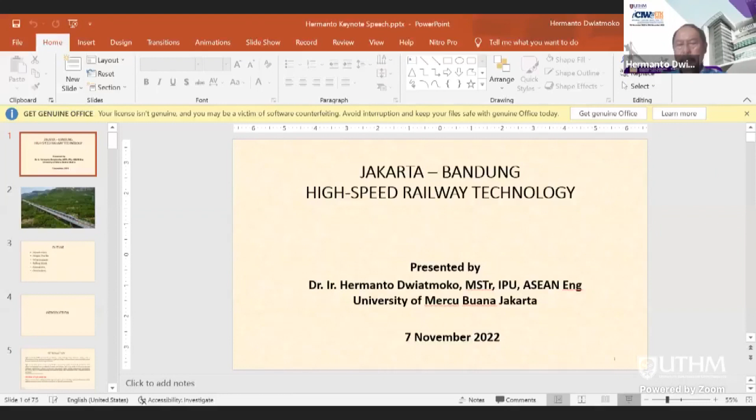Okay, can you see the presentation? Okay, so my presentation is regarding the technology of Jakarta-Bandung high-speed rail, this morning.

As introduced by Prof. Andri, my name is Hermanto Dwiatmoko. I'm from University of Mercu Buana, and also from Indonesian Railway Society, and also Indonesian Engineering Institute. I would like to start with a view of the EMU, but it is in China before they sent it to Indonesia.

So the outline of my presentation: introduction, then project profile, then infrastructure including the track and also signaling and telecommunication, then rolling stock, then operation, and finally conclusion.

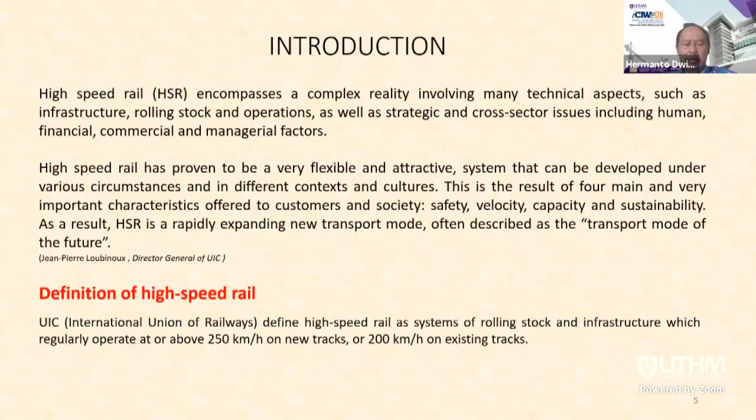Back to the history of the railway: in 1830 there was the first locomotive, founded by George Stephenson in England, UK. Then electric rail cars in 1903, and then the first Shinkansen high-speed rail in 1964, from Tokyo to Osaka.

Then 1981 is TGV from France, and then Pendolino, and then Spain. 2004 is KTX in South Korea. As you know, the maximum recorded speed of high-speed rail is more than 500 km/h, in France with TGV.

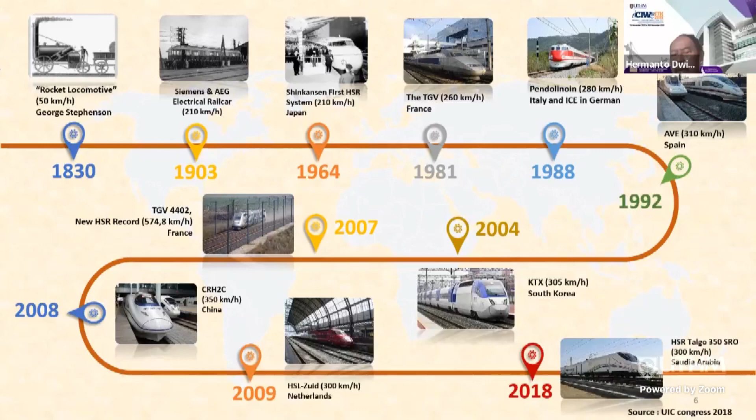Why do we develop high-speed rail? Because conventional rail has limits, especially for speed. First, conventional rail mixes traffic between passenger and cargo, which means we have a limitation of speed.

Second is the constraint of the route, especially because of the curves — small curves like in Jakarta to Bandung, about 500 meter radius. This means the speed cannot be developed.

Then there's the cost of investment for upgrading. If we upgrade our existing track now, it needs more investment because of the track — we have to straighten the curves, and also change the stations and the signaling and so on.

So it's better to use a new high-speed train. There's also the necessity to adapt new rolling stock fleets using the infrastructure, because we need more speed, and also we need new rolling stock. And then there's the difficulty of upgrading while operating.

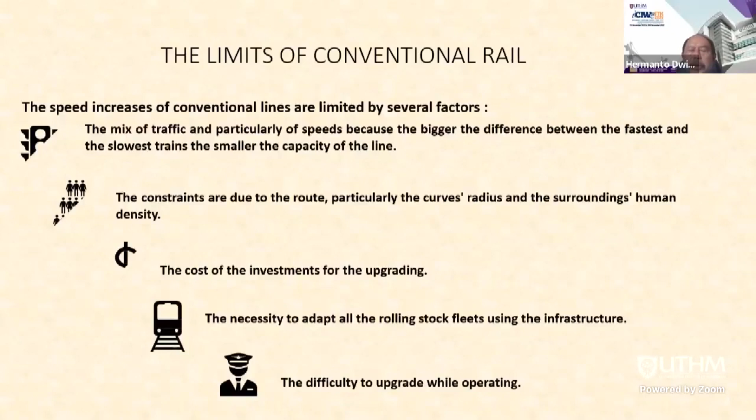We need more programs to upgrade how to operate from conventional rail to high speed. This needs upgrading.

Talking about the characteristics of high-speed rail: first, almost all are electrical traction driven via overhead lines. If we use diesel, this cannot run up to 300 kilometers per hour, so we need to use electric with overhead lines.

A stronger engine, dynamic weight shifting. The main engine is electric traction. It also has in-cab signaling as well as no level crossing. Usually because of the speed, signaling is shown to the driver in the cabin, not on the track, and there is no level crossing.

In Indonesia we have more than 6,000 kilometers of track, but so many level crossings. It means we cannot develop high-speed rail on the existing track, so we have to build a new one.

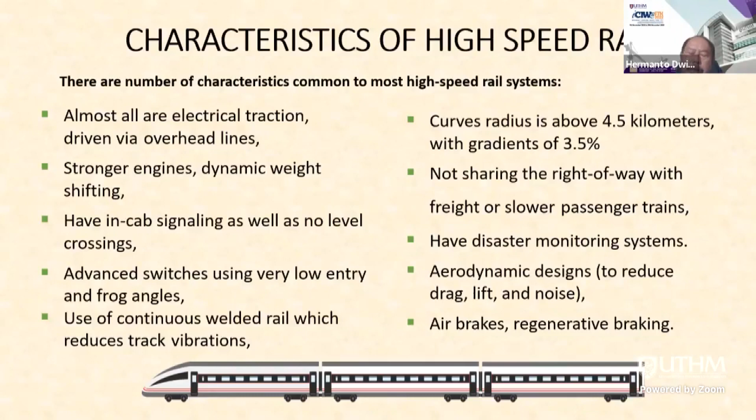As I mentioned before, the requirements for high-speed trains include interoperability — meaning one train and another can operate together — and capacity, meaning we must have enough capacity. Most importantly, there is safety, security, reliability, and sustainability.

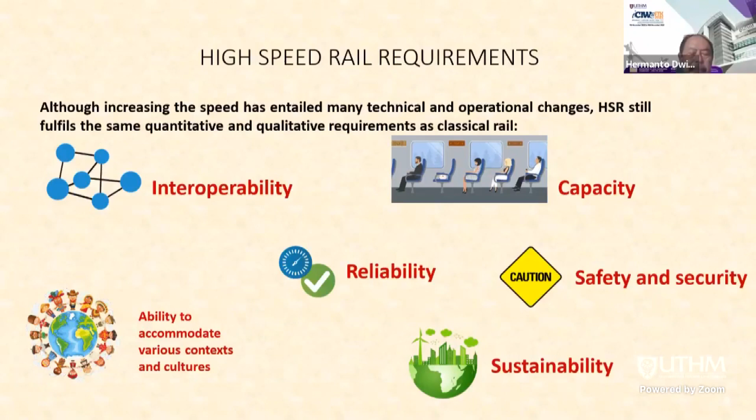This is the high-speed railway principle. First, high-speed railway is a system, including infrastructure such as civil engineering works, track, signaling, power supply, and catenary.

Then station — especially the location of the station in the city — and functional design, meaning we need to serve passengers and equipment. Then rolling stock technology, how to develop the rolling stock, comfort and design, operation, design planning, controlling, quality management, maintenance strategy and corresponding facilities, and finally financing, marketing, and management.

Secondly, the high-speed rail system is different everywhere, because of the condition of the countries. It means we have to design according to the conditions and depend on each country. The system depends on how all the components are designed and interact.

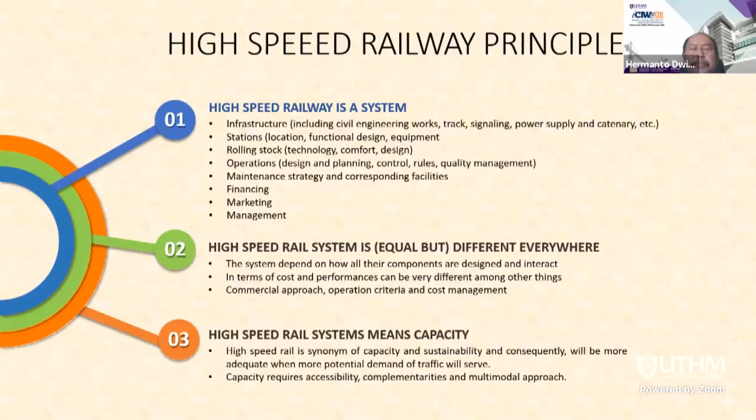What is the strategic value of a station? The location of a high-speed station is very important, because we have to serve the passengers who come to our station.

The station location has to be optimized to take advantage of reduced travel times. For example, with Jakarta-Bandung we need to shorten travel times. This means that when we build a station, we have to provide feeder transportation, for instance railway or bus, so that going from home to the station is not very difficult and travel time is shortened.

Stations also have to be well connected to the airport, mass transit, and light rail systems, as well as private transport. As I mentioned, in Jakarta the station is located in Halim, near Halim airport, and also connects to the LRT — the LRT Jakarta Jabodetabek, which will also operate next year.

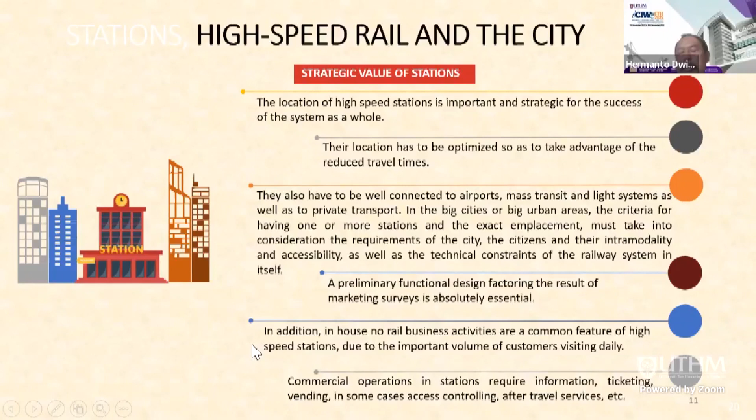Some people asked about the economic benefits. This is why we develop the Jakarta-Bandung high-speed rail. Some make a question about this, so it provides fast and efficient transportation so riders can save time, energy, and money. From Jakarta to Bandung by car now takes a minimum of 3 hours.

If we take the high-speed rail, it's about 40 minutes, which means that we save time.

The high-speed rail is extremely reliable and operates in all weather conditions. Even in big rain, it's no problem. But if we use the bus or car, it depends on the weather of course. It operates on schedule every day without delay, especially during rush hour and peak travel times. This is important for operating the high-speed rail—punctuality and no more delays.

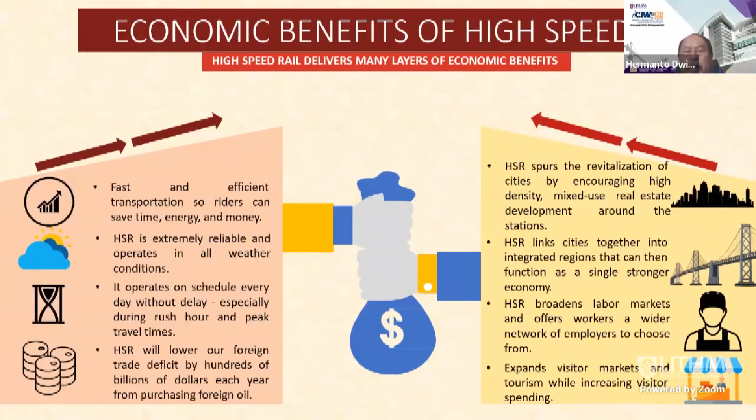How do we implement the high-speed railway? First, of course, the emerging phase, then the feasibility phase, then design and construction and operation. Up to now, Indonesia's high-speed rail from Jakarta to Bandung is ongoing in the construction phase.

As in this chart, we can see that we need time to develop, to make the design, the survey of the condition of the land, the condition of the city, and also the earthquake risk and others. This is the staging.

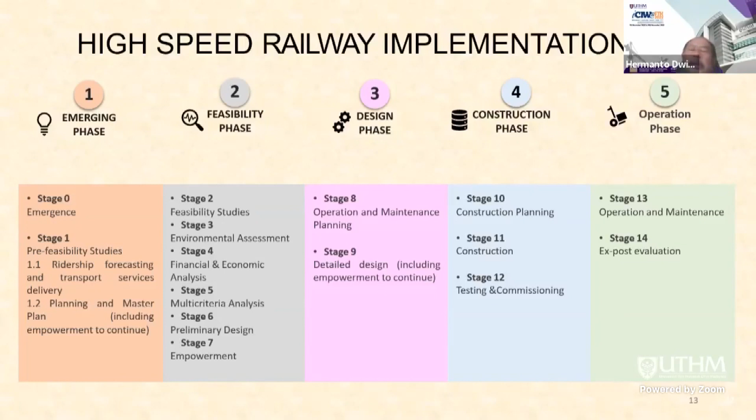Why is high-speed rail applied in Indonesia? These are some of the reasons. First is congestion relief—usually in Jakarta and Bandung, especially on weekends, it's crowded, and from Jakarta to Bandung we need more time than usual.

Then there's the alternative to flying, meaning it's better to use high-speed rail. This isn't for Jakarta-Bandung, but if we apply it to Jakarta-Surabaya, I think we can change the mode from air to railway, because Jakarta-Surabaya is more than 700 kilometers. If we take the airplane, it takes 1 hour 15 minutes, plus the time to go to the airport and waiting time and so on—it ends up being more than 3 or 4 hours total.

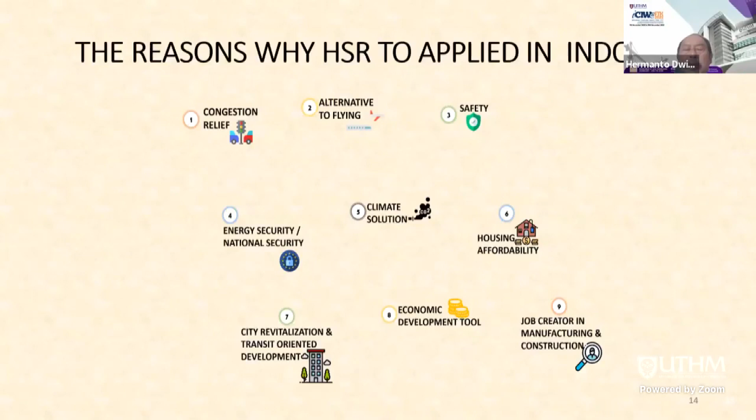In high-speed rail, just a minute—first, how to share the growth of the economic growth.

First is develop the 4 stations: Halim, Karawang, Walini (now changed to Padalarang), and Tegalluar. This means this is the new location of the high-speed rail.

And then, advanced technology and comfort—it means we have to get more comfortability for the passenger. So I would like to share how we start with high-speed rail.

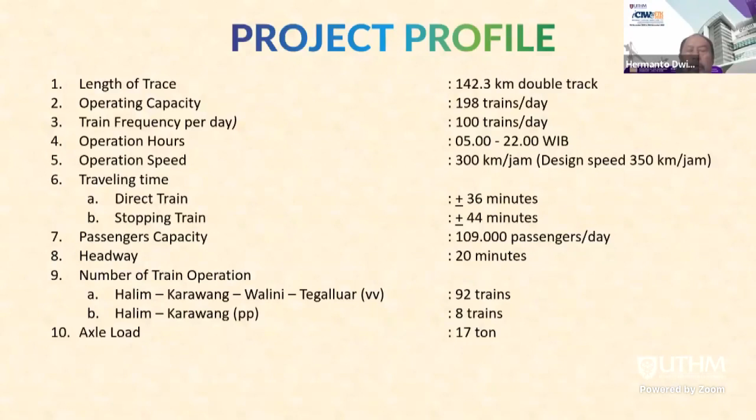This is the project profile. So this is the map of the Jakarta Bandung high-speed rail, with a total length of 142.3 kilometers, consisting of ballasted track.

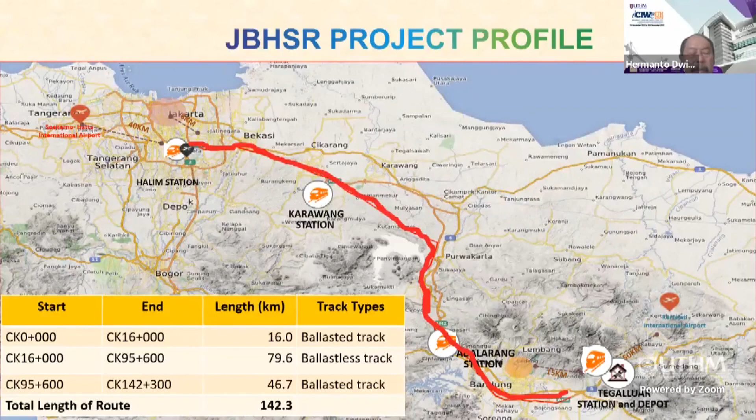16 kilometers of ballasted track, 79.6 kilometers of ballastless track, and also 46.7 kilometers of ballasted track, depending on the location.

But the finance—from China, Beijing Yawan HSR company is 40%, and the Indonesian side is 60%, consisting of PT Wika, PT Kereta Api, Jasa Marga, and also PT Perkebunan.

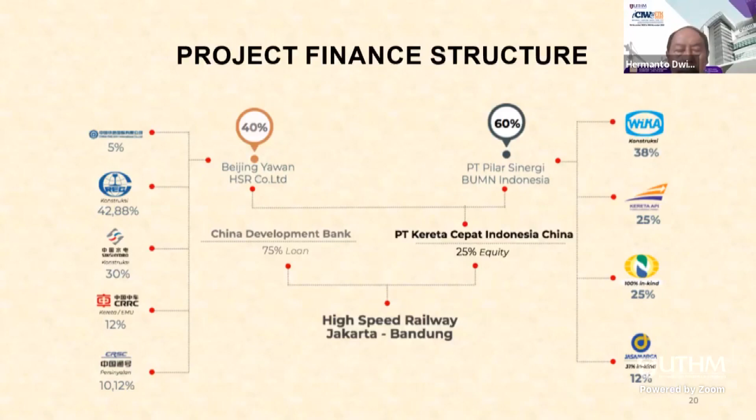Regarding the contractor, on the Indonesian side we have Wika, the civil contractor, about 30%, but most of the project, 70%, is from China, consisting of CRIC, CREC, Sinohydro, CRRC, CRSC, SCRDC. We can participate to build the civil work, especially the concrete.

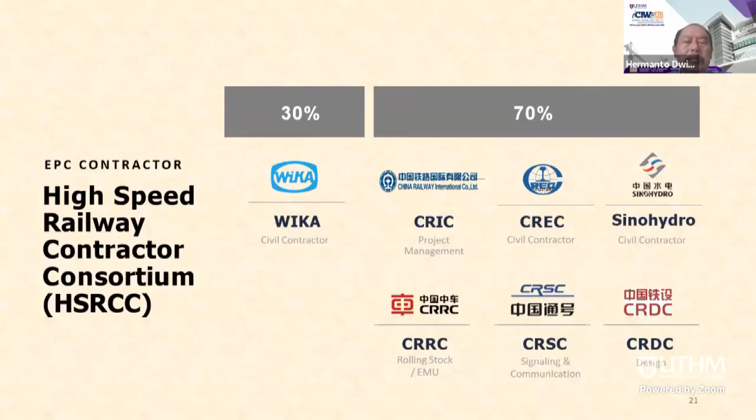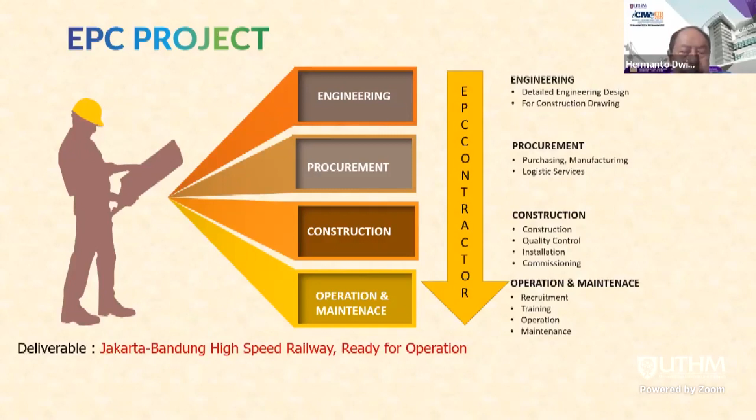The role of the EPC contractor, HSRCC, is the China high-speed rail EPC contractor. First is engineering, internal supervision, quality control, project timeline control, and management safety. Second is conducting coaching and transferring knowledge to all members. Third is regular coordination with all members, developing teamwork and team building.

This is important. So about the technology—first I would like to share the infrastructure of the high-speed rail. This is the elevated section. We consist of ballasted and ballastless types according to the design.

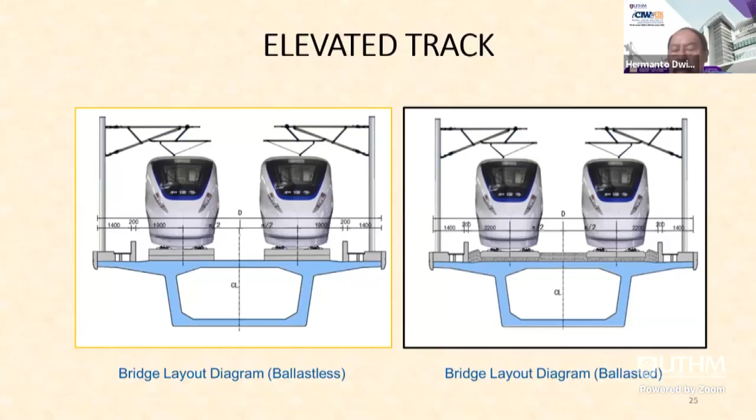Ballastless is on the left, meaning we use a slab track, and the right is ballasted with ballast. This is the construction of the elevated pile, and then also the bridge.

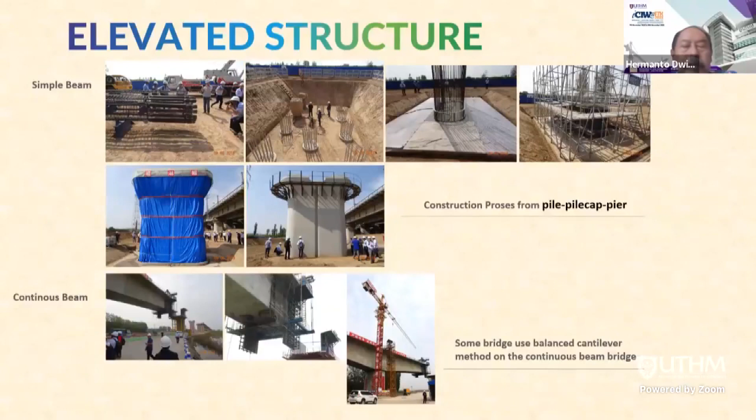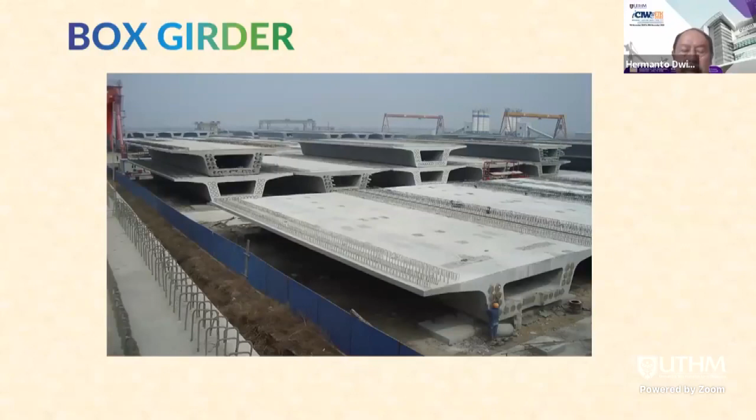This is the box girder, produced by PT Wika in Cikampek factories. This is how to erect the elevated structure, using some machines from China, directly brought from China.

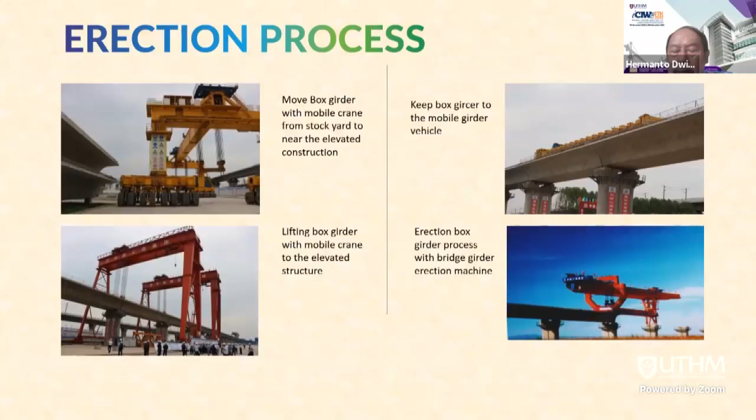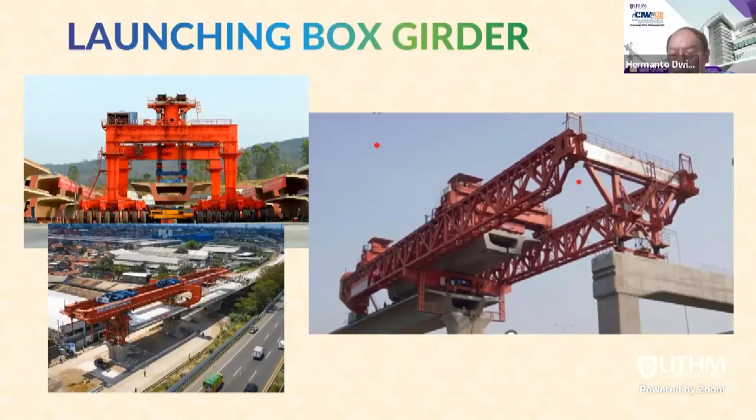And then how to launch the box girder with these facilities. And then the track, with ballasted and also ballastless track.

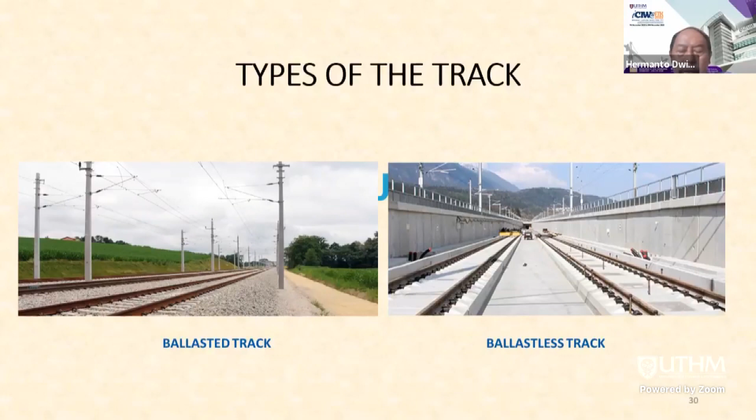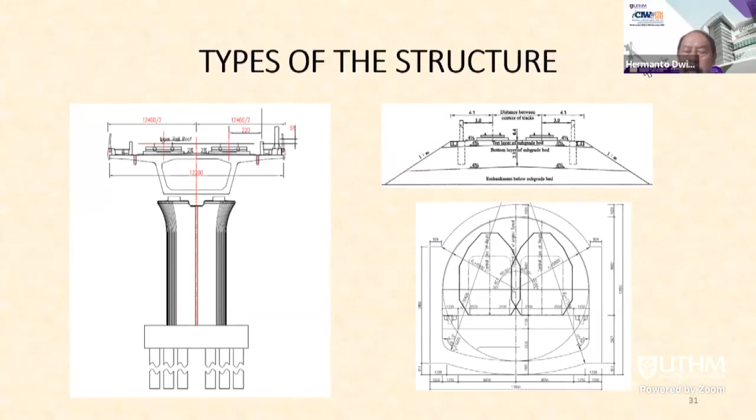This is the structure of the elevated track at grade. On the right is at grade and also the tunnel. This is the elevated structure of the track.

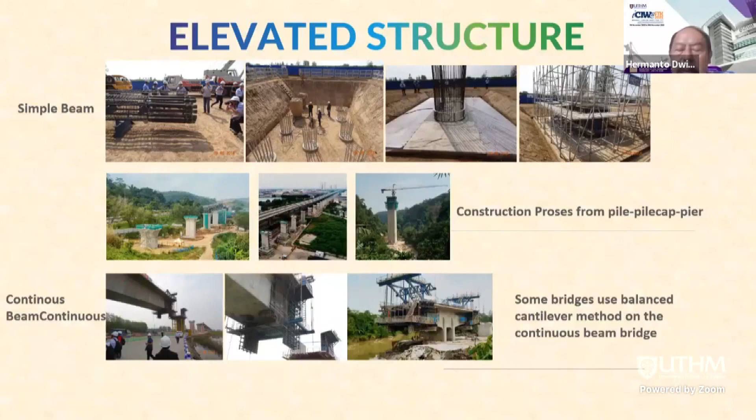We also have 13 tunnels from Jakarta to Bandung, especially from Karawang to Padalarang. From Karawang station to Padalarang, there are several tunnels. One is in Halim, because we have to cross the highway tollway, so we have to build underground tunnels.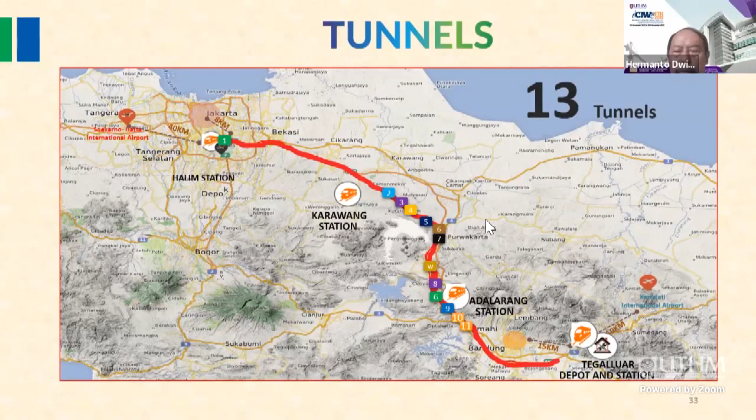The others, from Karawang to Padalarang, go through mountains, so you have to use tunnels to develop the route. So this is the tunnels.

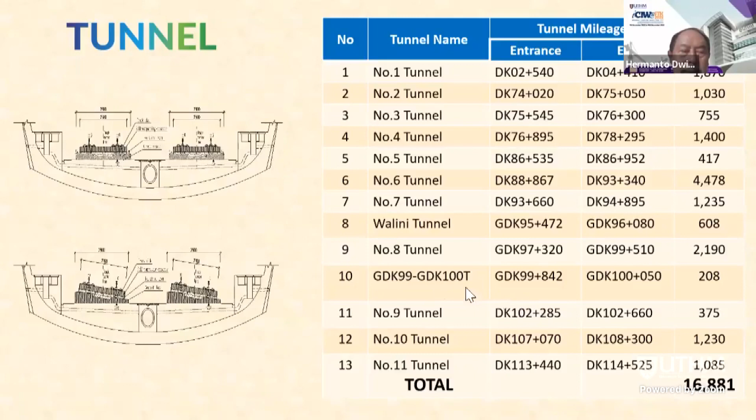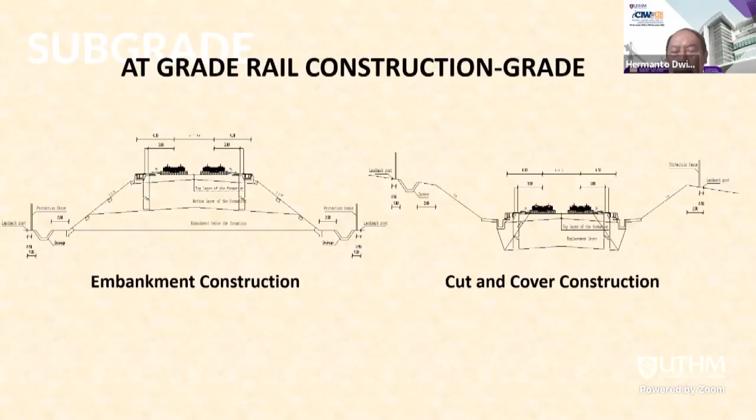13 tunnels with total length 16.8 kilometers. In the grade, we have two alternatives: first, embankment construction, and second, cut and cover construction, depending on the location.

And then also a subgrade on muddy. This is what we call TBM, tunnel bore machines, in Halim station. Manufactured by Nanjing Tiongkok, China, with diameter 13.9 meters and 3,649 tons.

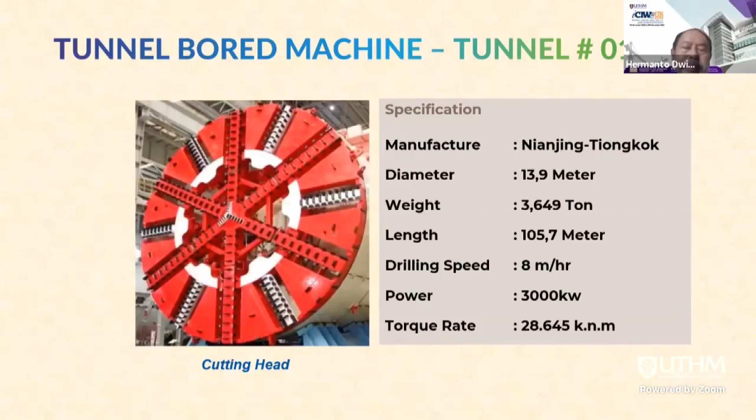Length 105.7 meters, drilling speed 8 meters per hour. So if we construct the underground tunnel, we need more time. The power is 3,000 kilowatts, and the torque rate is 28,645 kilonewton metre. This is the tunnel construction.

And then this is the batching plant, slab track casting in the factory, and box girder casting in the workshop.

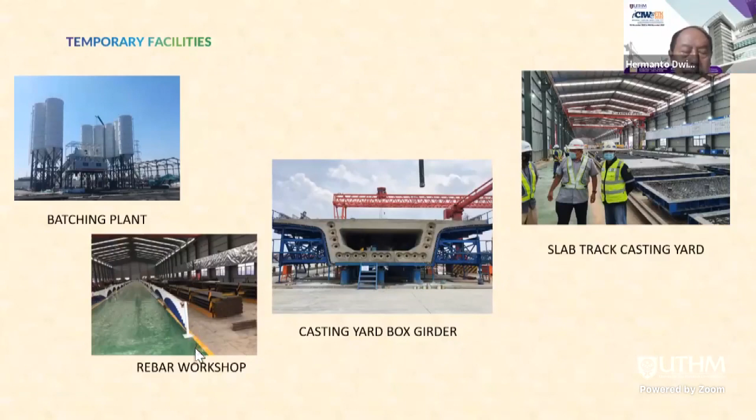And then passenger service information, it is also from China, because now we are still in the process. Station public address system, and also the public address and schedule, and so on.

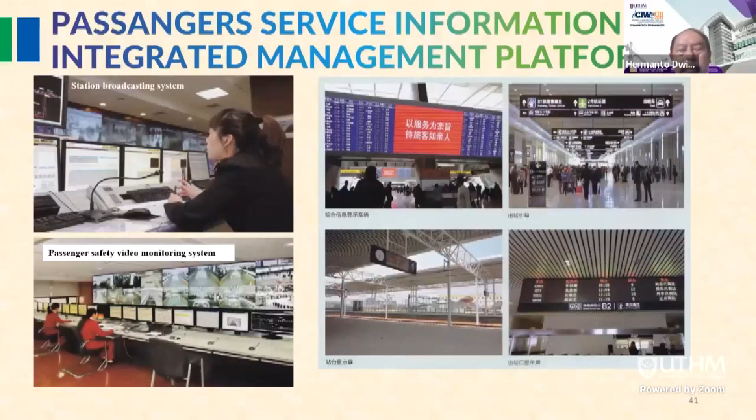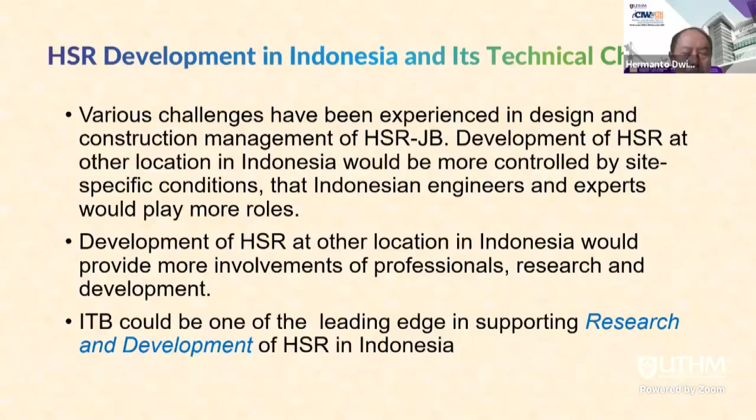Potential roles of ITB in research for the next projects - I think ITB can have the opportunity to research and develop how to build high speed rail in Indonesia.

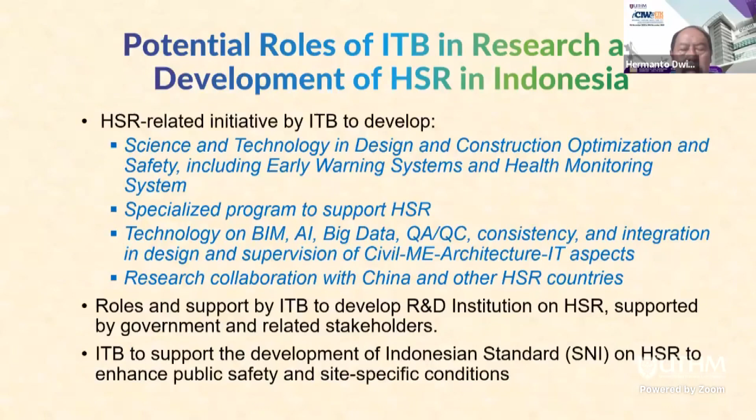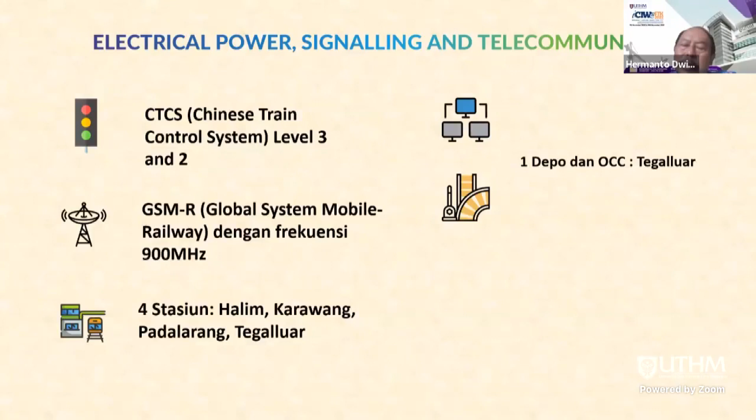For stations: Halim, Karawang, Padalarang, and Tegalluar. We also have the depot and OCC in Tegalluar, Bandung. And the overhead catenary system is 27.5 kilovolt.

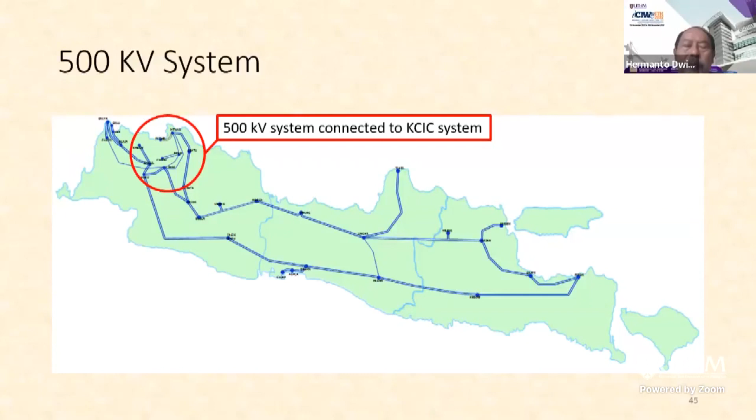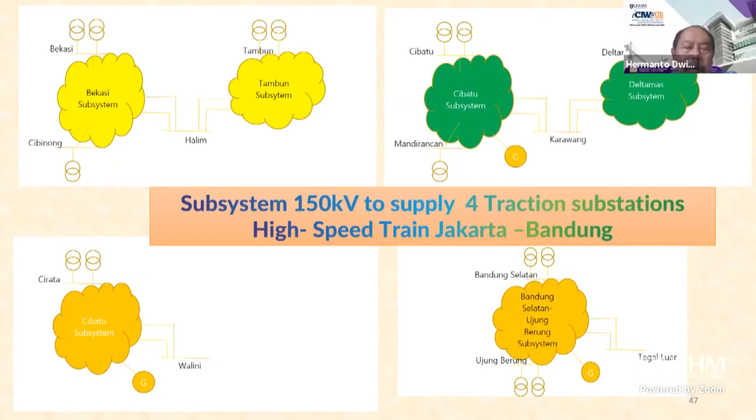This is also about the power. In Tegalluar and also in the stations, all power comes from PLN. PLN is the electricity company of Indonesia. We have 150 kilovolt to supply the traction substation.

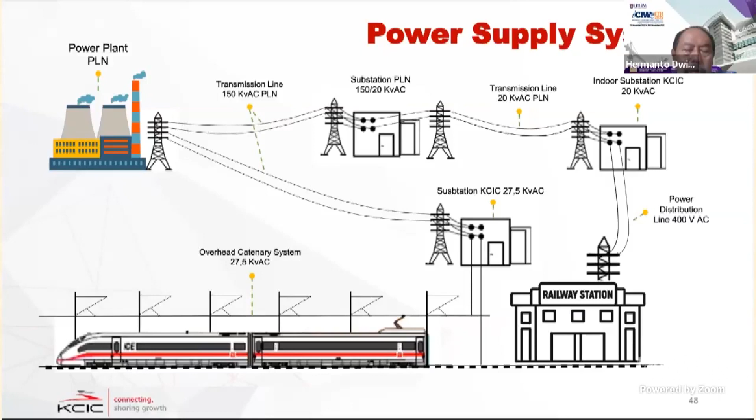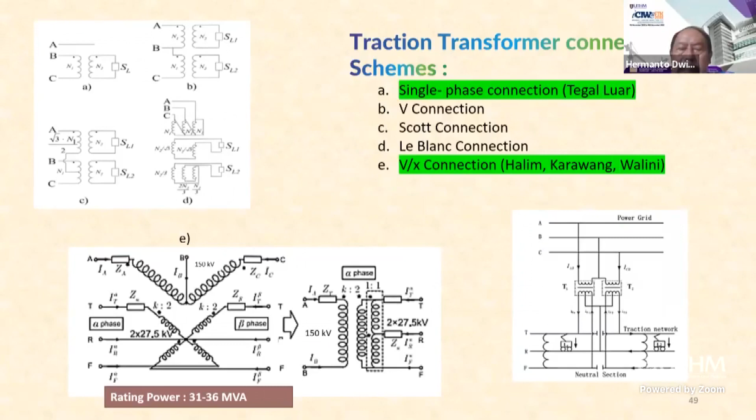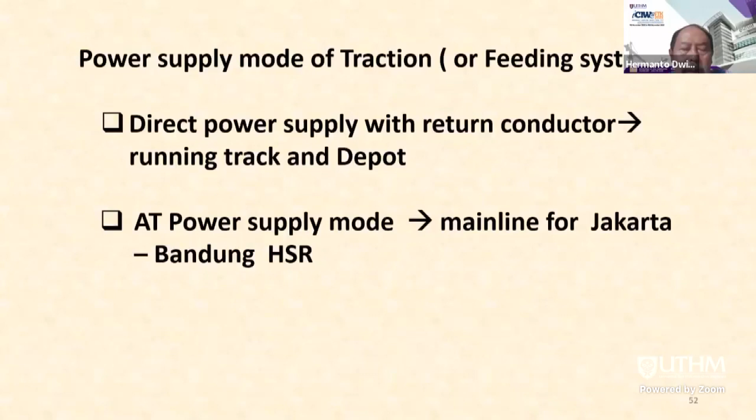Single phase traction transformer in Tegalluar. Power supply mode of traction: direct power supply with return conductor for running track and depot. For the main line of the Jakarta-Bandung high speed rail, this is also auto transformer.

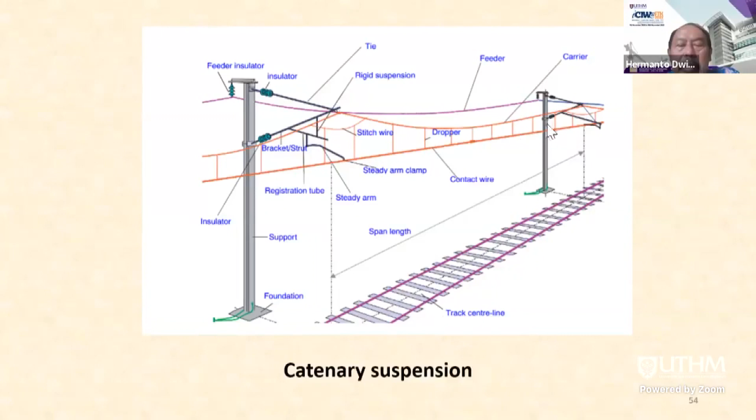This is the catenary. We use a catenary like this, still under installation. And then for safety, communication must be very important - how to reach full speed and how to brake.

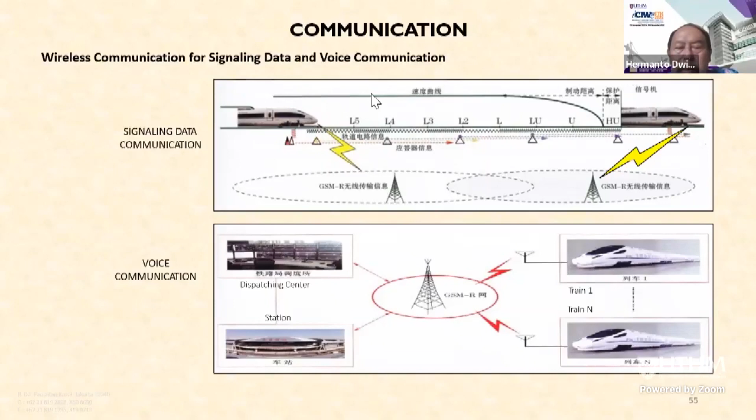And now I would like to share about the rolling stock. This is the rolling stock, so EMU - we usually say EMU, which is Electric Multiple Unit. The type of EMU is CR400AF.

The drawing is like this. The capacity of one train set consists of 8 cars, including first class, dining car, and second class. VIP 18 passengers, first class 28 passengers, and second class 555 - all the passengers total about 600 passengers.

The track is double track, 142.3 kilometers. Rail gauge 1435. Maximum speed 350 kilometers per hour. And the traction voltage is 25 kV.

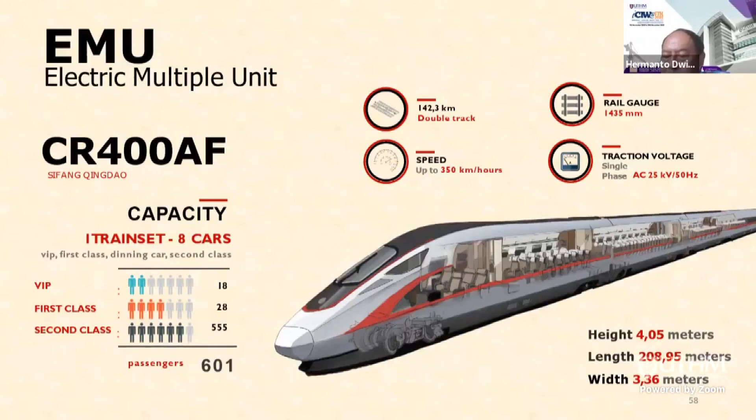This is the first in Indonesia - we use AC, while in Jabodetabek we use DC 1500 volt, but now for the high speed rail we use 25 kV. 4 meters height, length 208 meters, and width 3.36 meters.

We also have the CIT, which we call Comprehensive Inspection Train. Before the operation, we have to run the CIT to know the condition of the track, track geometry, catenary system, communication, signaling, and wheel and rail force inspection, integration system.

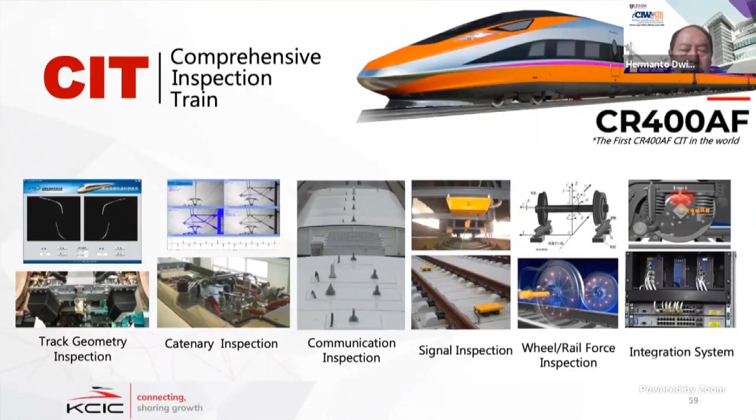With this, we have one set of cars, an inspection car, so we can know about the infrastructure. The safety of the infrastructure will be checked this way.

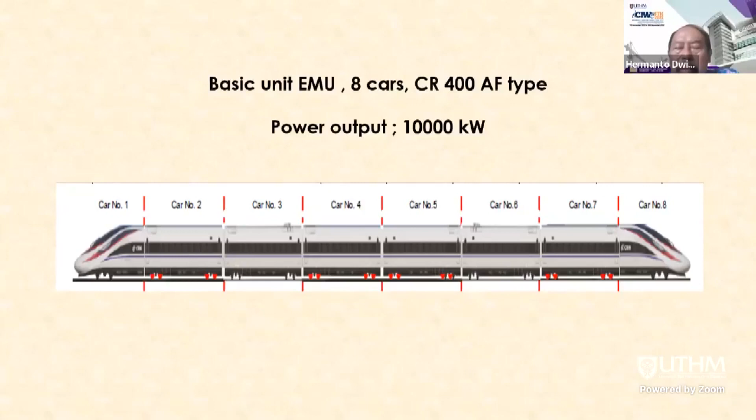This is the basic EMU, consisting of 8 cars, type CR400AF, with output 10,000 kilowatts. It consists of 8 cars.

Traction motors are in cars number 2, 4, 5, and 6. Every car has 2 motor bogies. A trailer bogie is a bogie without a traction motor.

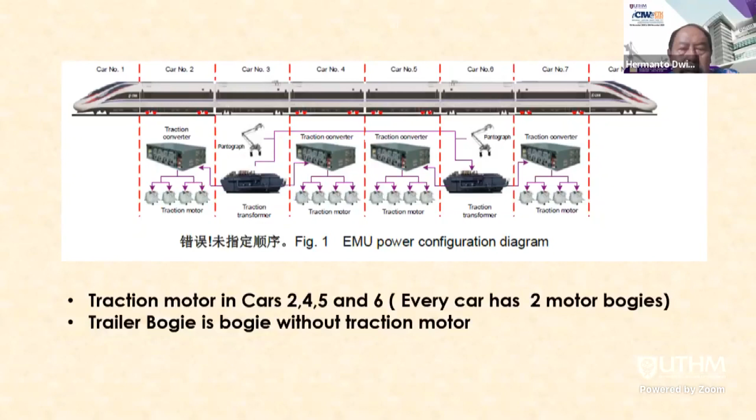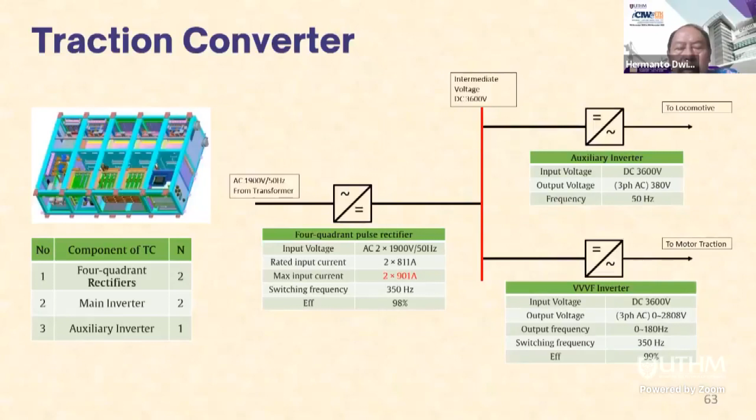This is the traction transformer, traction converter, traction motor, bogie and wheel rail, and there's a pantograph and catenary.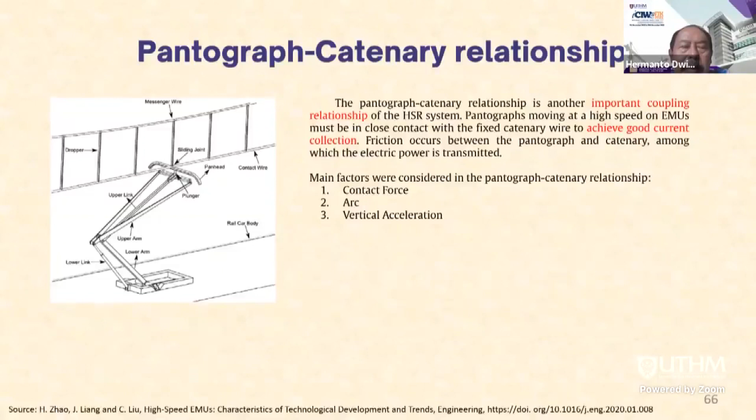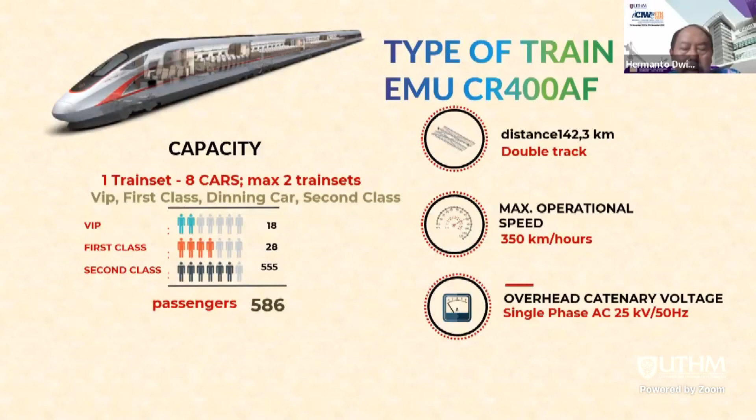And then about the operation, we use new generation of EMU CR400AF. We call it Komodo. Komodo is the one in Komodo. Type of the train, capacity, and then also maximum speed.

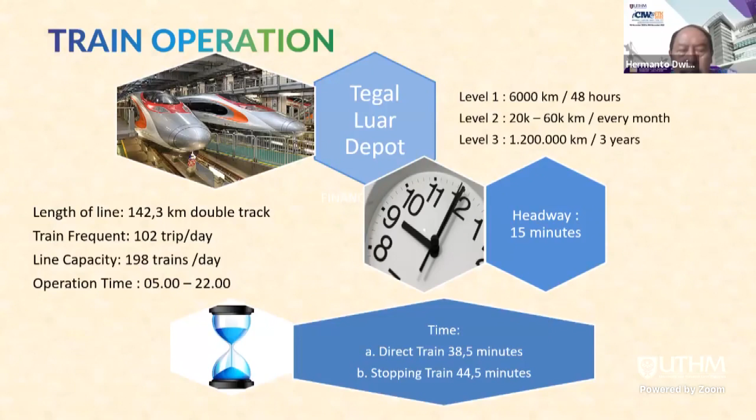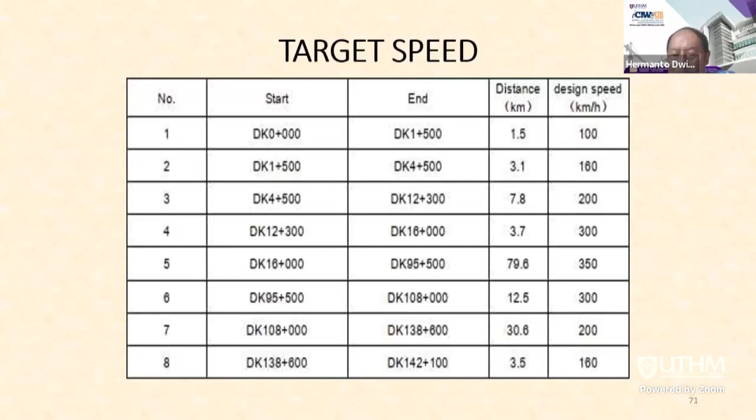And then headway time for the time of the train. And then this is the target speed. Not all of the track is maximum speed, but we can see in number 5, between DK16 to DK95, about 80 kilometers, we can use the maximum speed at 350. But another location, for instance number one, from Halim, starts at 100 kilometers maximum in the 1.5 kilometers, and then develops 160, 200, 300. The maximum is 350, about 80 kilometers, and then number 6 is 300 now, and then 200 is the station.

Conclusion. Various challenges have been experienced in the design and construction management of high-speed rail Jakarta-Bandung. Development of high-speed rail at other locations in Indonesia will be more controlled by site-specific conditions, so Indonesian engineers and experts would play more roles. Development of high-speed rail at other locations in Indonesia would provide more involvement of professional research and development.

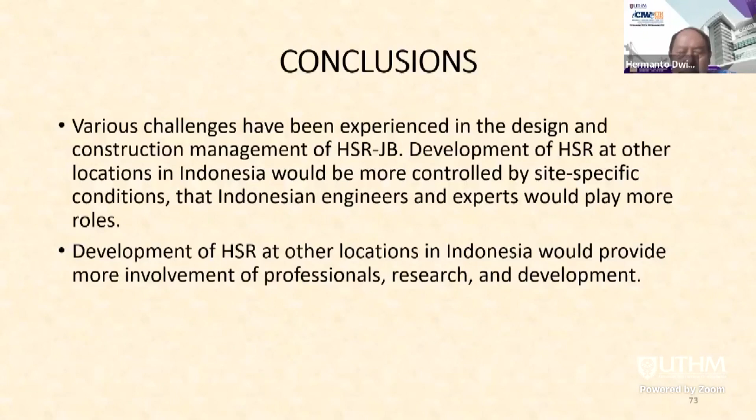Last week, Mr. Jokowi, the President of Indonesia, mentioned that we have to get a plan to extend the high-speed rail not only Jakarta-Bandung but also up to Surabaya. So it means that we have to get more researchers, professional, and so on. That's all my presentation, Professor Andri. Thank you very much.

Pak Hermanto, in your view, can the train speed increase further for high-speed rail services? Maybe from 350 to 500 km per hour? Is the technology outrunning the safety measures? Will speed and safety go hand in hand? Yeah, thank you very much for the question.

So 500 is now the record speed in France, but according to discussion with some colleagues, the economic speed is 350 maximum, because if we expand the speed up to 500, it needs more energy, imagine how much is needed. It means we need more costs, and then the tariff and so on. This is why the world maximum now is at 350.

This is the second question, about safety. Of course the safety of the high-speed rail is very important. As I mentioned in the explanation, we have the CIT inspection car to know about the condition of the track, for safety. This is Pak Andri, thank you.